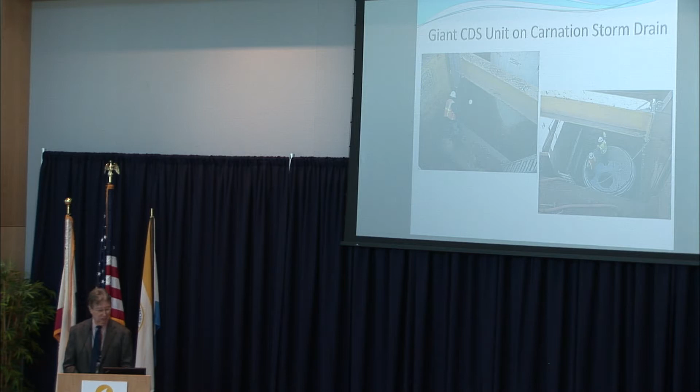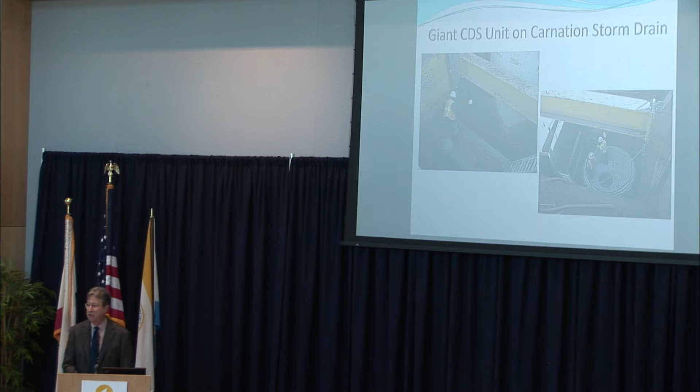Including this gigantic CDS unit on our Carnation drain, in Begonia Park. The Carnation drain is the biggest drain we have in the city, draining the area from Fashion Island and portions of Corona del Mar. This was a monster to put in—you look down into this pit, it was over 30 feet deep, and you can see the workers are dwarfed by the actual CDS unit. A great project, one that's certainly having a big impact on cleaning up water coming into the bay from that drain.

We have another similar project planned for Polaris Drive. This is an area over by Irvine Avenue, covering small portions of Costa Mesa, 17th Street, and we'll be putting this in—I think this is Galaxy Drive. That's something that's in the works right now, at least for planning.

And then these cool devices are trash skimmers. They're just kind of an upsized version of the things you might see in your pool. While they don't cruise around, they're actually hooked up to a dock. They've been very successful in collecting trash. We have 6 of these installed now, and we're looking at installing more around the harbor.

And we actually did some quantification of the stuff that we found in these trash skimmers. You look through here, you see there's a lot of items that are plastic related: lids, forks and spoons, floating bottles. So we qualitatively understand that trash is an issue, but the floating plastic, that's something we think we can get a handle around, because it's stuff that's been used once and then tossed and is not finding its way into the proper receptacles.

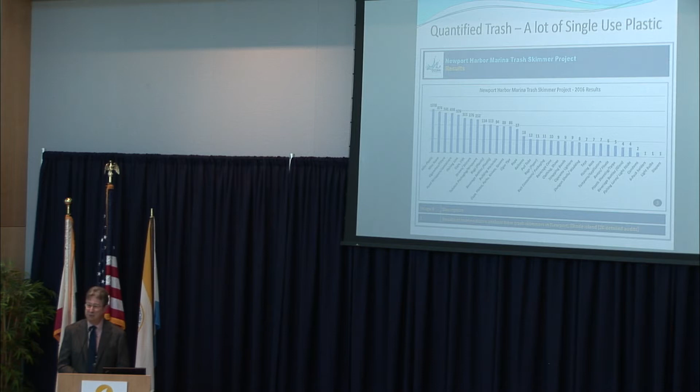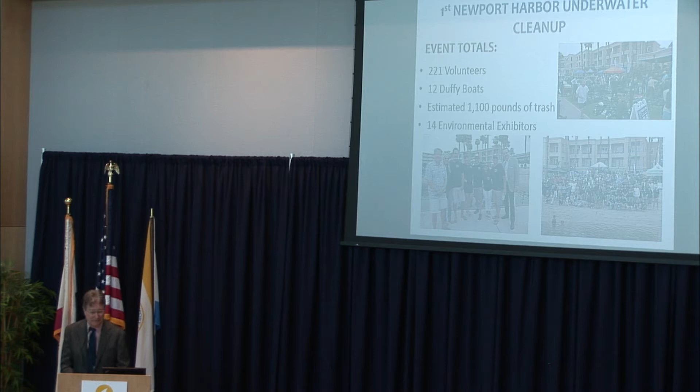But I should caution you that 1,000 pounds of trash may sound like a lot, but when we're talking hundreds and hundreds of tons of trash coming in every big storm, then you can see it's just kind of the tip of the iceberg.

So while we've been moving forward proactively as a city to step up our game on removing trash, the state last year implemented these new trash regulations. They're great. They're requiring every city and every agency to reduce trash by 100% over the next 10 years. I should say reduce trash from the high priority areas. So each city and each county is going to have to find out where their big trash generation areas are, and then come up with a plan to reduce it every year by 10%. So theoretically, after 10 years, there should be no trash coming from those areas. It's great, we're really enthusiastic about that. We're encouraging our upstream neighbors to get on board, and they are.

Now these new regulations, there's a couple options how you can move forward. The option that most cities in Orange County are opting for is called Track 1. Under Track 1, you install these full capture systems. That's a pretty big word for what they actually are, which is these catch basin inserts. The way they work is you have a pipe coming out of the catch basin. You install the screen ahead of that outlet so that trash dropping into the catch basin stays within the catch basin, and then the water can flow through the screen and go out the storm drain.

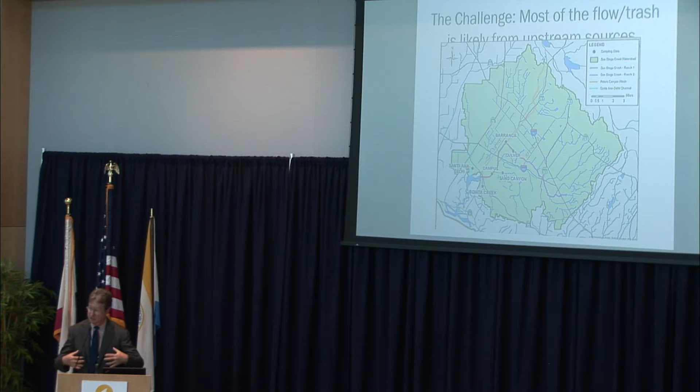And it looks like this needs a little adjustment here, but the challenge is that most of the flow coming into Newport Bay is not from our storm drains. It only accounts for perhaps 5% of the total freshwater flow. It's coming from San Diego Creek and the Santa Ana Delhi Channel. The tributary area here is shown in green, and it covers Lake Forest, Irvine, Tustin, Santa Ana, and Costa Mesa. So most of the freshwater flow is coming from these cities, and while we don't know quantitatively if this is true, we can hypothesize that most of the trash is also coming from these jurisdictions.

So we need to reach out to them and come up with solutions on a more regional basis in order to effectively capture these huge trash loads coming down the creeks. We're looking at two regional facilities here. One is the Santa Ana Delhi trash facility located on the Delhi Channel, and the second is the Waterwheel that is potentially going to be located on San Diego Creek just upstream of Jamboree Road. This also shows the location of the Boudreaux boom, that picture I showed earlier. It's located just downstream of Mesa Drive on the Delhi Channel. That Boudreaux boom can perhaps handle one ton of trash before it will break free. We're talking hundreds and hundreds of tons that we really need to capture.

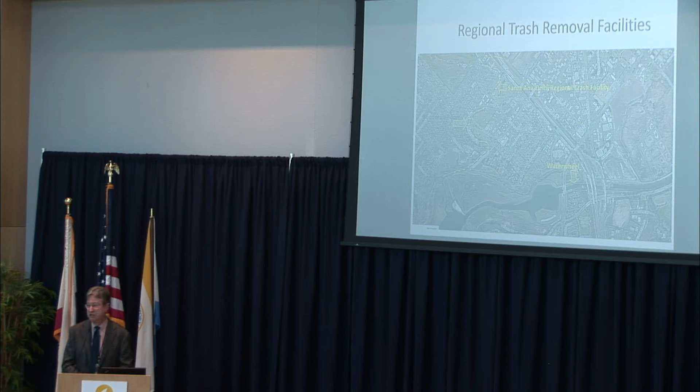So let's first talk about the Santa Ana Delhi Channel Regional Trash Facility. It's in construction right now. It captures an 11 square mile tributary area, including Santa Ana, shown in green, Costa Mesa, John Wayne Airport, and small portions of Irvine and Newport Beach. The location of the facility is in the Newport golf course next to the Delhi Channel, just to the south of Bristol Street.

So I will show you some pictures of that. However, it's a little hard to see from the pictures, so I'm going to start you out with the engineering drawing, and walk through the different elements - hopefully you can bear with me here.

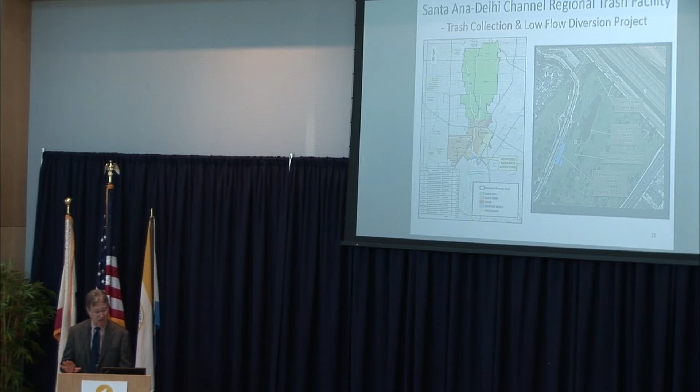The green lines show the walls of the existing flood control channel. In the center of the channel, shown in blue, that's where we have a small low-flow channel that keeps the small quantities of water in the middle of the channel. What is proposed is to divert that low-flow channel to the side channel shown at the bottom - you see the blue lines coming off toward the side of the channel at the bottom. That will divert all the water into the trash collection facility.

Now, before it enters the trash collection facility, there's a little magenta line there - it's called a Coanda screen, I'm going to show that to you in a moment. Once it flows past that Coanda screen - I actually do need a laser pointer here - it flows into a series of trash nets, I'll also show you a diagram of that. Then the water, for low flow summer flows, will be going into a sump area, and that water is pumped to the Orange County Sanitation District. That water will be cleaned up and then sent over to the Orange County Water District for additional treatment, and then inserted into the groundwater replenishment system for potable water use.

This is for the summer flows. During storm flows, this facility will be able to capture trash from the first flush event, but all the flows will go back into the bay. The flows are just too much to send to the Orange County Sanitation District.

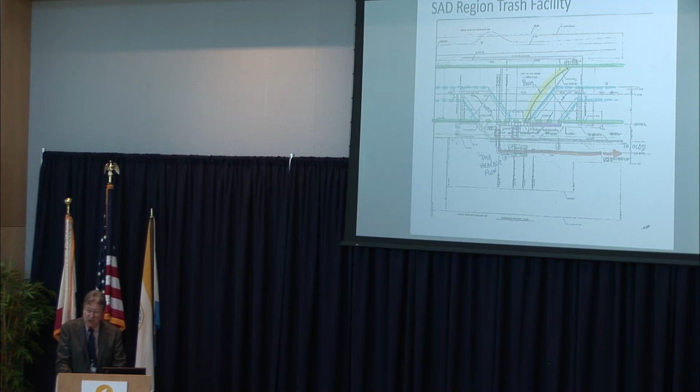Okay, so I first want to show you what the Coanda screen looks like. Again, this is the low flow that's coming off the channel, and before it enters the trash collection facility, it goes across this Coanda screen. What this does is it separates the trash from the water, so the trash is on top of the screen. There are little veins that allow the water to come through the screen in an efficient manner, and the cigarette butts and the leaves and the small trash down to a size of 5 millimeters is sloughed off into the trash collection area.

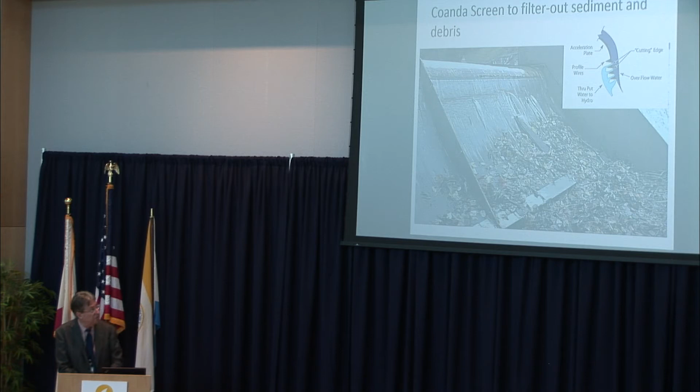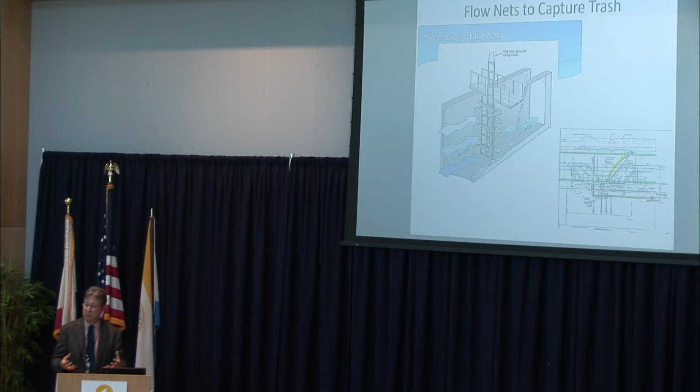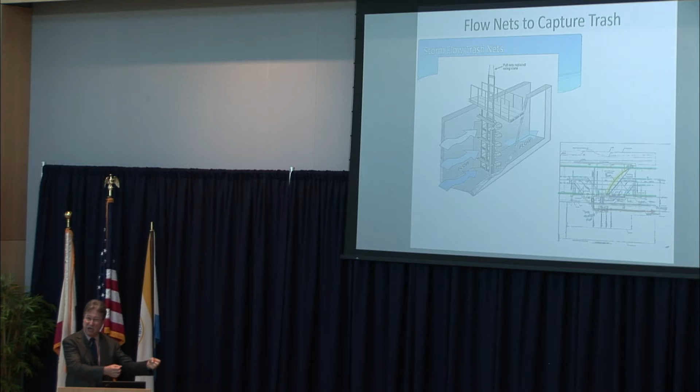Then this flow goes through these trash nets that are stacked vertically, and these trash nets will capture the floatable trash. During a large storm, as these nets get accumulated with trash, the water level rises, and then the floatable trash goes into the next bank of trash nets. At the end of the storm, the crews come in, pull these bags out, and replace them with fresh bags.

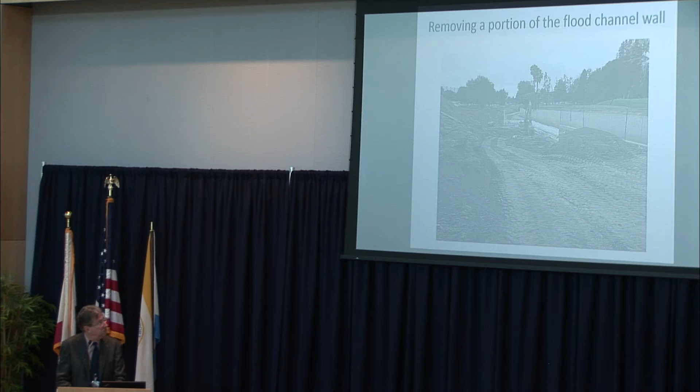So here are some photos. This is when they were initially removing a 250-foot length of the flood control channel wall. And this is at the Newport golf course.

And then they created these - you can see they stacked sandbags here so that the flow within the channel is being diverted around the construction area. They constructed the low flow channel diversion in and out of the trash collection area. It's probably easier to see on the next photo.

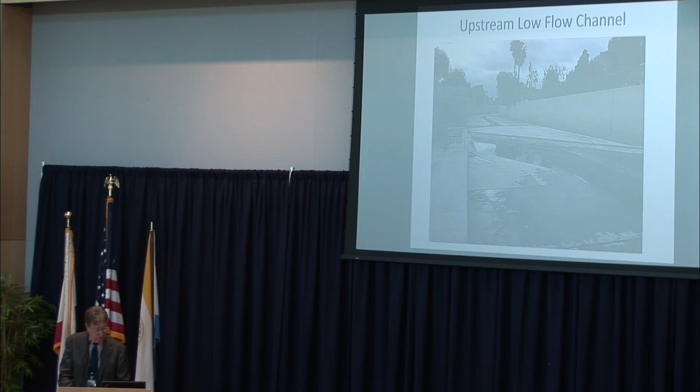This is the access road into the trash area, from the golf course into the trash collection area. At the bottom, while they have not been installed yet, is where the trash bags are going to be installed - this bank of trash nets.

Just downstream of that, as a final trash capturing mechanism, we have this large screen. Anything that escapes the trash nets will be caught in this large fence screen. You can see here during construction, even though the pump station is not operating, trash was being diverted into that area and captured by that screen.

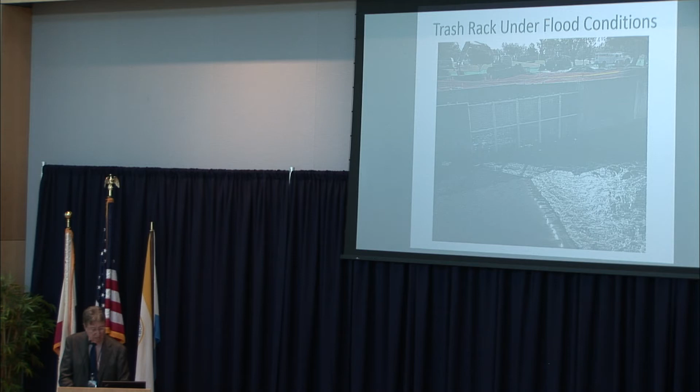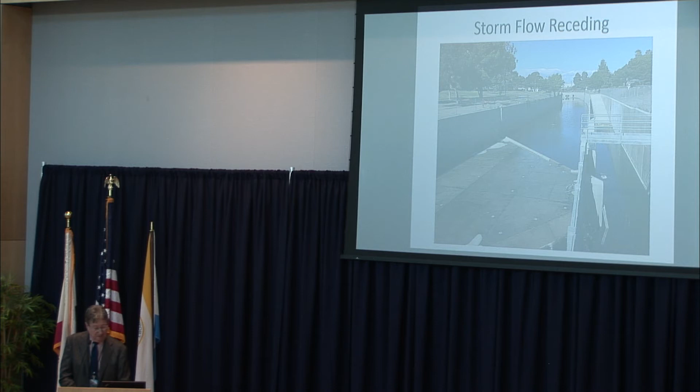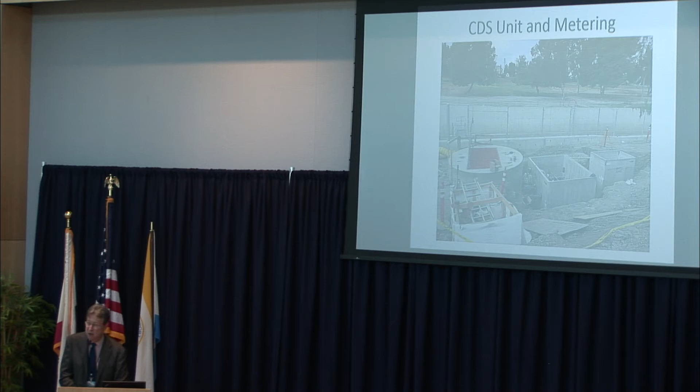This photo shows that once the water in the sump gets pumped out in a force main, it first goes into a CDS unit, into a flow monitoring vault, and then pumped to the OC Sanitation District line. This is showing the City of Costa Mesa actually installing the force main.

The projected schedule is that this will be online in fall. Design, construction, and O&M costs are about $9.3 million. The funding partners include Santa Ana, the County of Orange, City of Newport Beach, Costa Mesa, OC Water District gave $1 million, IRWD, and we also got significant help from OCTA's Measure M grant funds.

So this was kind of a groundbreaking regional effort, one that we think would be appropriate for the San Diego Creek folks. They also have engineered channels, so this type of design could be modified and adapted for San Diego Creek. We've actually proposed that to the partners. We anticipate there will be extended discussions on that facility that could take many, many years.

So in the interim, we're looking at the Waterwheel trash facility, which does not have the ability to capture trash down to 5 millimeters, but it has the ability to at least capture a sizable amount of floating trash. The location of that would be just upstream of the Jamboree Bridge on the San Diego Creek.

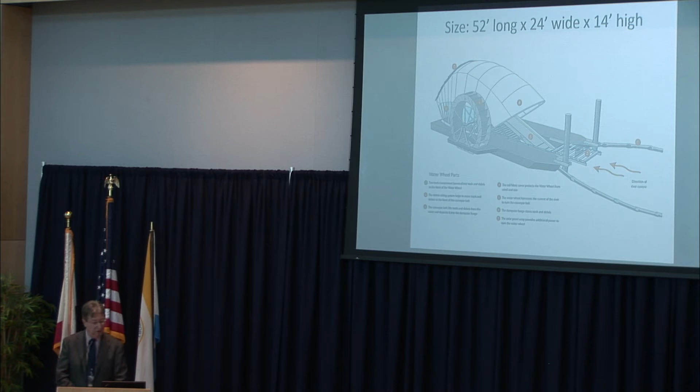The way this works is there are two booms that channel the floating trash to the trash wheel, and then the trash is loaded onto a conveyor belt. The conveyor belt is operated by this water wheel, which is powered by the stream flow and assisted by solar energy. The trash is then dumped into a dumpster, and when the dumpster is full, a boat comes in and hauls it away to a place where it's loaded into haul trucks for landfill disposal.

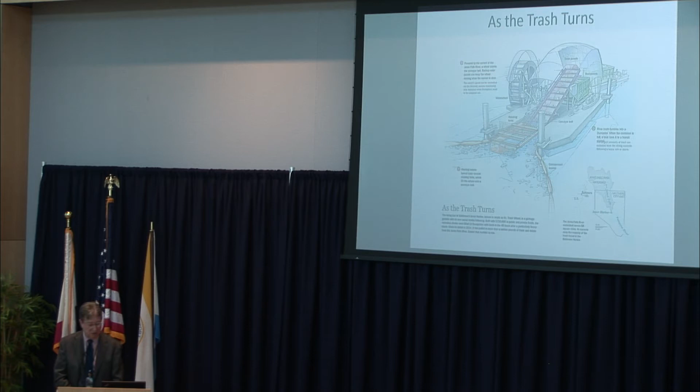Here's another view showing the boom system. So our proposed location, as I mentioned, is just upstream of Jamboree Bridge.

I'll walk you through how this would actually work. We've done the preliminary engineering on this - somewhat of what I call a feasibility study to see if it is possible. We won't actually know if we've found all the hidden problems until we get into the final engineering, but at this point, we don't see any red flags.

So the way this works is a trash truck comes into an entrance off of Jamboree Road, and then it comes to the end of the roadway and backs into the turnaround area and then pulls forward.

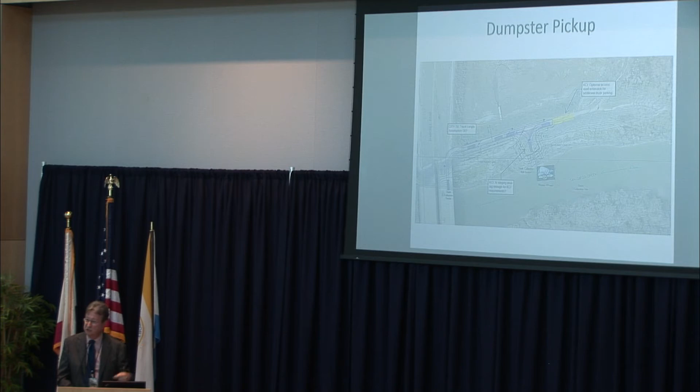The dumpster, which is out on the waterway, sits on a rail system, and the cable is activated, and the dumpster, which is full, comes up the slope to the landing pad area. At that point, the truck backs up, loads it up, hauls it away, and another truck comes in with a fresh dumpster.

And that might be a little easier to visualize in the next diagram, where the water wheel is sitting on the water, and the green dumpster is at the back of the water wheel. Now you can see the rail system here, and you can see how it's sitting on a pile system, and the dumpster is transported to the top of the hillside.

It's a little unusual for Newport Beach to have something like this, but we certainly have the opportunity for landscaping and fencing this area so it's not going to be an eyesore, and it's also not going to be a security issue.

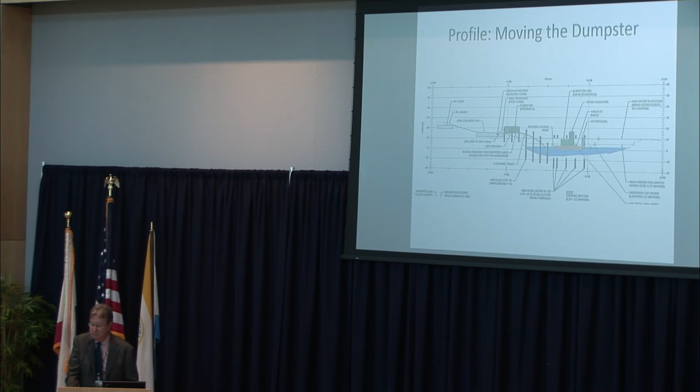A potential schedule, which may be a little aggressive, is that we're completing the preliminary engineering now. We're working on the CEQA environmental documents, which should be completed by August. At that point, we'll hear if we've received grant funding from the Ocean Protection Council. The grant application has been submitted, and now they're just waiting for us to complete the CEQA before they make a determination.

Assuming we get the funding, and assuming we have successful further discussions with flood control, since this is their jurisdiction, then we would move forward with construction documents, with potential construction starting in May 2020. I think that would be the best case scenario.

Construction cost is about $1.6 million, 6 to 8 months for the construction. So we're kind of excited about this.

Because of the location, it's going to be visible from Jamboree Road as well as the 73. We've already had some people who want to have their sponsorship shown on the sail of the water wheel. We think there are possibilities for reaching out to kids—I think it'll be attractive to them to see this kind of mechanism at work collecting trash. So we're very interested in this, but we're still not at a point where we can say for sure that this is a viable project. But at this point, it looks like it's a go.

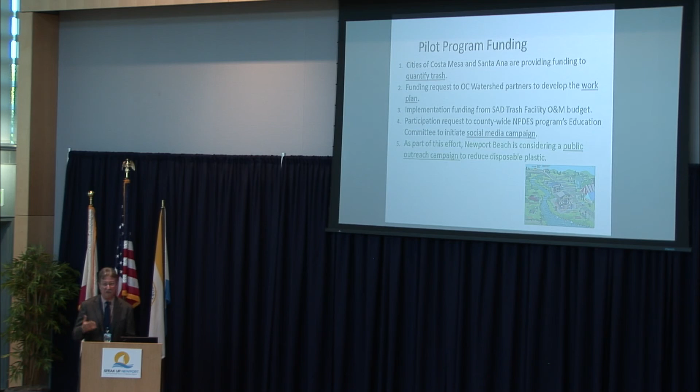And then finally, through our Water Quality Committee and the efforts of Public Works, we're trying to reach out to the Restaurant Association with some flyers, with suggestions like bring your own cup, straws on request, kind of things, just seeing if we can move forward here without upsetting folks too much. So this is kind of the soft sell we're trying on this pilot program. We don't want to make this threatening.

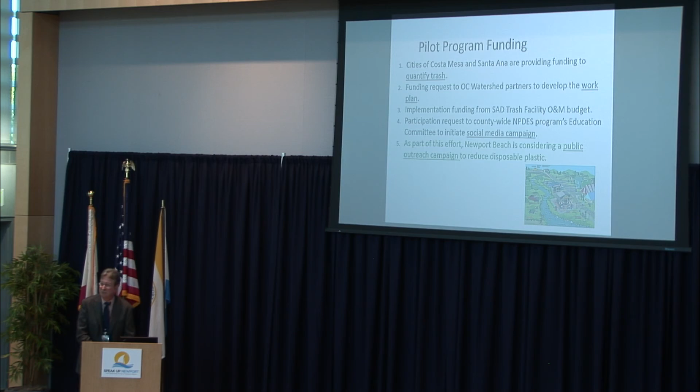This is a question with regard to the trash that's collected, either with the Waterwheel or other places throughout the city system. Where does all that trash go, and is it divided? Is there potential for dividing it and recycling?

Dave, do you know? Sorry, that's a good question.

Currently, your residential trash collector is CR&R, and they come around and pick up your bins. That material is taken to our city yard where it's transferred onto trucks, and then they take it to what they call a material recovery facility. There's one in Stanton, one in Garden Grove, and actually Huntington Beach has one too. They physically separate the trash, take out the recyclables, the metals, and things they can recycle. Some of it, the green waste, is used in the landfill as alternative cover every night. The rest of the trash is disposed of in a landfill. Currently, that's how the operation goes.

Back to Mrs. Hart's question about alternative energy - I do know they've tried that in the past. You've got regulatory agencies, like the Air Quality Control Board and others, who haven't really embraced that yet. I toured a demo alternative energy plant out in Lake Perris several years ago. They were taking the trash, turning it into pellets, and burning it off to create energy. But of course, you've got something coming off that you have to deal with. So I think that's getting closer, but will the citizens of California allow that as one of the solutions to waste, creating energy out of it? Yet to be seen. Did that answer your question?

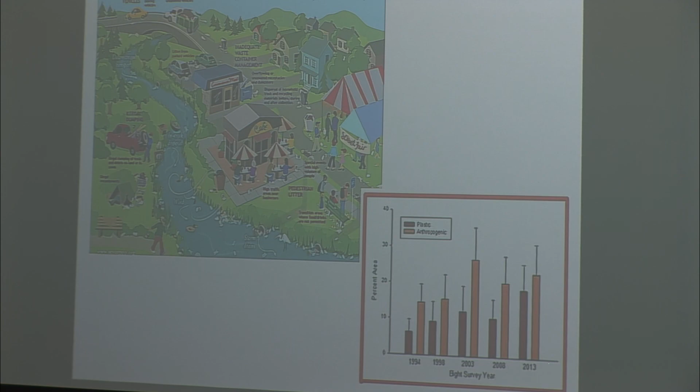So it's all kind of leading us in this direction. Can we move away from plastic? Can we get into more biodegradable materials? Can we reduce the reliance on plastic products in fast food restaurants? That's kind of the direction we're heading here, but you may have more information about that.

These big scoopers—I think they can hear me—oh, I see on the internet these pictures of really big ocean scoopers that seem to be taking up huge amounts of trash off the ocean surface. And I haven't seen anything engineering-wise or informative, other than a picture saying, 'oh, look what we can do.' I haven't been following that.

I know one of the council members told me he sailed through that garbage patch last year, and he said there's hardly any trash there—it's like one piece over there and one over there. So it's not these big things you can scoop up. I guess I'll have to do more research, and I'm a little skeptical about those devices.

Oh, you have a question? Is the city actively working on another outlet to the ocean in West Newport?

This question comes up every year. As you know, we don't have good circulation around Newport Island channels or the turning basin, and so if we had gone back 100 years ago, we would definitely have wanted an outlet at that west end of the harbor.